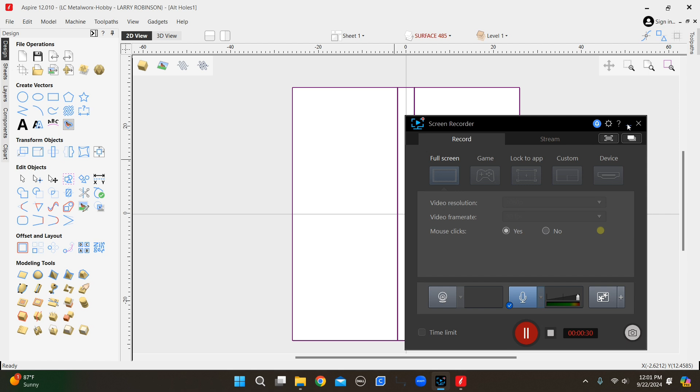So I may just show you my drawings, and I'm not that creative, so the things I'm doing are more or less from this video. Let me just bring it up real fast. I think there's a guy named Bob Cole that has asked me to put that link up of that video. I never knew much about him, and I still don't. I just ran across that video, and he has his drawing for sale, and I bought it for like 15 bucks.

Forgot where that was for sale, probably on Etsy. Eigen is his name. I'm looking for him right here. This is him. I'll give him full credit for anything I'm doing because he gave me the inspiration of what I'm trying to do. So the video that I'm talking about is this GOAT Spoilboard, greatest of all time Spoilboard. And so that is where I got my inspiration from.

I wasn't going to watch this right now. And of course the cat's grabbing one outside while I'm trying to video, so see how that works out.

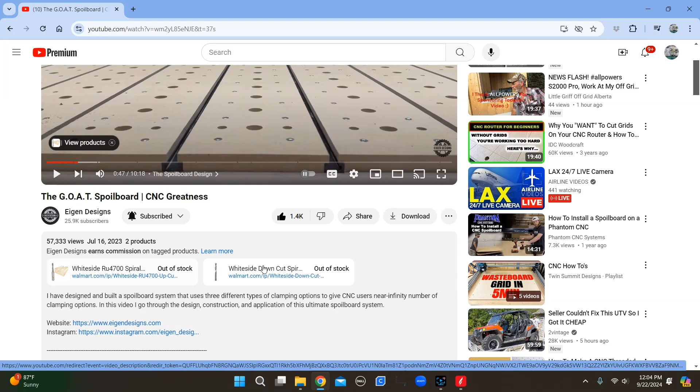I just wanted you to know that this is the design that I've bought and am using. I don't remember where he sold it, and the G-code that comes with it, he had it in a Onefinity, but he was using a large, like a 2 or 3 inch, see, there's 3-inch surfacing, 1/2 inch shank. We can't use 1/2 inch shank on things that we're doing, so I couldn't use any of that. I don't use other people's G-code normally anyway.

But anyway, this is kind of the T-tracks that I bought. Let's see if it's the same ones or not. Yeah, that's the same ones I bought. They're $43 for 4 pieces. I've actually bought 12 because I may put some on something else. At the time, I wasn't sure if I was going to use 8 or 9, so I think I bought 3 packages. So for 8 of them, like I'm using on the Altmill, it would be about 90 bucks.

And they give you the dimensions here, which has been useful for how I've been milling that out. And I'll show you that right quick. I'm hoping to get through this quick, I keep messing around. But anyway, get that over with.

I showed you this is the video, Eigen Designs, greatest of all time spoilboard. This video was made in July of '23. And somewhere in here, probably on his website, he does have a link to selling different files, and that right there is $15.99 for all of the files, which comes with a whole lot of other parts besides just that.

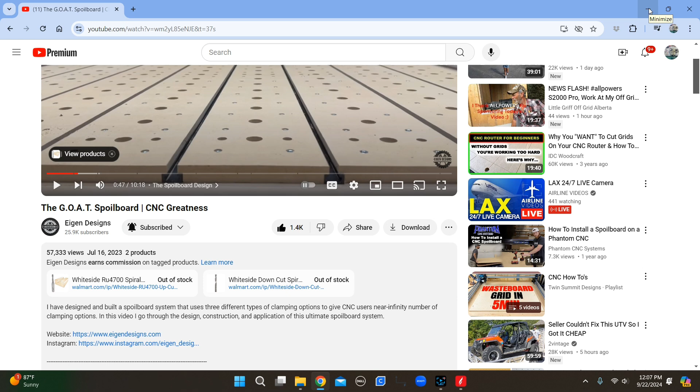It's also good to see how square your machine is. You need to get your machine really square and calibrated, and I went through all of that yesterday.

The easiest way to find how square your Altmill is as far as the cuts, there's a calibration tool in G-Sender, but honestly it was telling me to move it the wrong direction. So if you use that, think about what you're doing and the measurements you're getting, because it kind of dumbs down everything—it just says move the Y left this direction or that direction. Either I misunderstood what it meant, or it was just telling me the wrong direction.

So it took me a couple hours probably to do something I could have done in about 30 minutes. Let me show you a good way to do this though.

Let's just make this—that's another thing, the width is 51 and 7/8, which is the size of a piece of plywood or MDF that will fit down in that table. Those cross runners are about 14 inches apart, and the back two are about 11, I think, because it's turned different from the rest. I think the slot in the top of them is about where that measures.

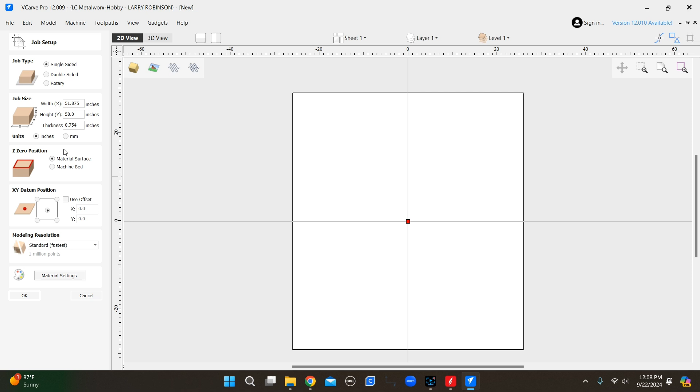So anyway, let's bring this up and I'll show you quickly—just draw something big that you can measure easily. I have some long steel machinist-type rulers that I like to read between a tenth of an inch, a hundred thousandths. I can see probably within 20 or 30 thousandths looking at that, so that's a little more accurate than using a measuring tape.

Some people like to drill holes and put pins in it, but you're going to do that a lot of times, so I wouldn't drill a lot of holes personally. I used a 60-degree V-carve bit and just drilled about 10 or 15 thousandths into it, then took a pencil and colored it in so I could see it clearly, and then measured that.

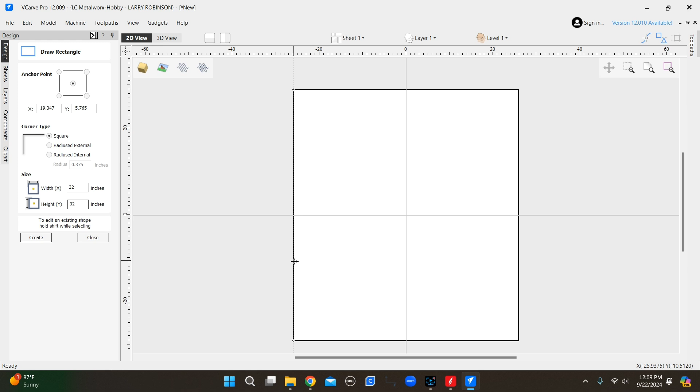So anyway, I think I was using, say, a 32-inch—I used the same in X and Y, 32-inch. So let's just draw a quick rectangle. I know there's plenty of ways to do this, but this is a quick and easy way to draw it.

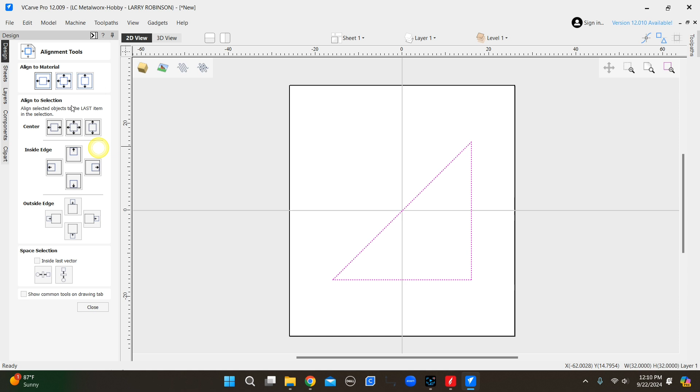Now all you need to do is, if you want to put this on center—I guess that is center, okay. I personally don't like it there. I know I'm wasting a lot of time, but anyway, let's not worry about that.

So you could actually pull your dimension tool up right here and just—oh, that's not the dimension tool, I grabbed the wrong one. Here we go, let's just dimension this out so we have it.

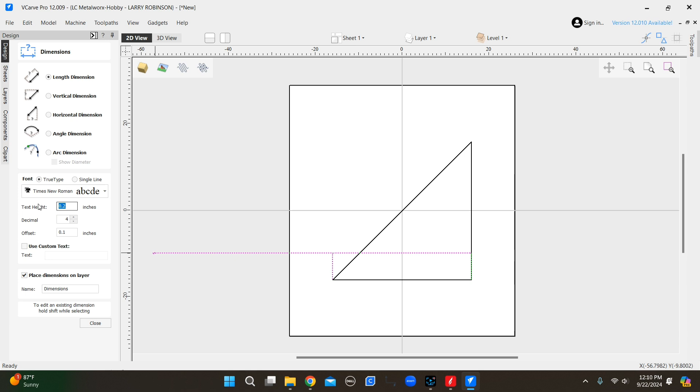Let's make this big enough to see—just put about 2-inch letters in here so we can see this. And there's that dimension, and the other one will be the same. Whoops, I'm not sure if I snapped to that just right—let's try that again.

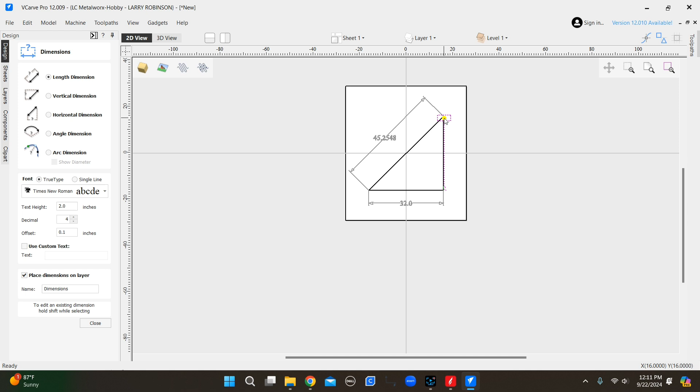Okay, and we know this is going to be 32 inches, that's what I drew it to be. So anyway, just for the fun of it, you can do things like that.

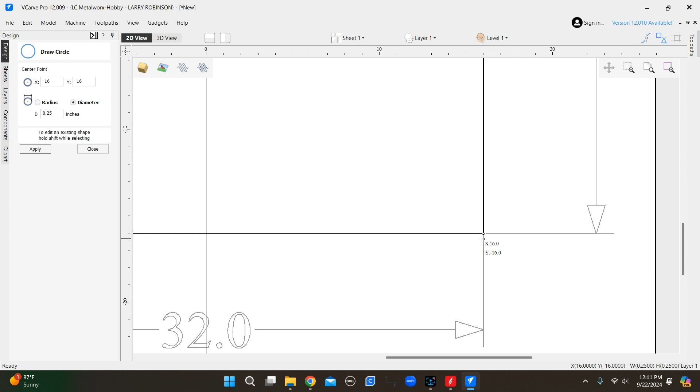Let me paint this so you can see this better. So when you just set your zero right there, let's just put a dot there for the fun of it. What you can do there is—it's just very easy to do your own method and stay out of the G-Sender tools if you can.

A lot of them are really dumbed down for people that just don't understand how to do things, and they need to learn how to do them, honestly. It's not helping you if you keep using really dumbed down tools, like surfacing for instance. The surfacing tool in there will work, but it doesn't work as well.

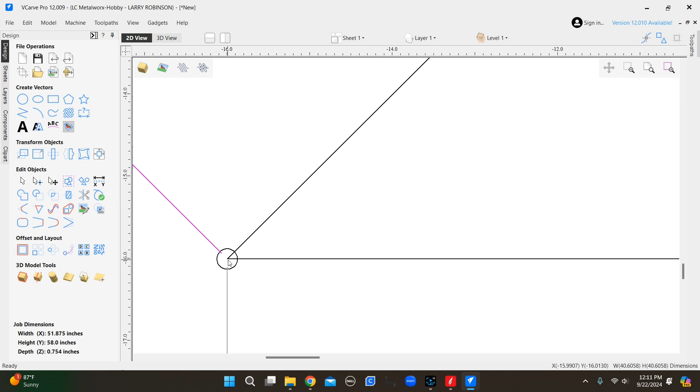There's something going on where I can't seem to select that. I don't care, I'm just showing you that you're going to have points that you drill right in those areas.

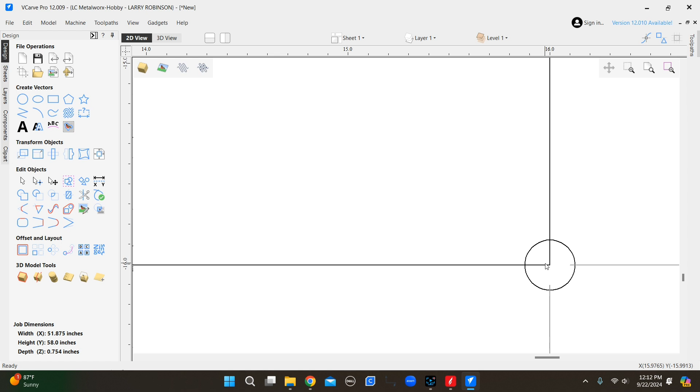So you're going to move the machine 32. You're going to come down and just drill a little small hole with the V-bit or whatever you want to do, to depth, just barely move it down, and you can run that machine around with the spindle on, and you don't have to mess around like you would if you didn't. If you use the G-Sender, you really can't run that machine because it takes you out of your main screen to do that.

So I just came around and I moved it 32 inches, drilled me a little tiny mark in the wood, and then I took my steel rule and measured these numbers. Honestly, the only number that really matters is as long as you measure this one and that one and you're getting really close to 32 inches - you may not get exactly, because you're eyeballing and measuring, you're not necessarily going to get exactly this.

But this cat's really driving me nuts. He never does this, but here I am on a video and he wants to whine all the time.

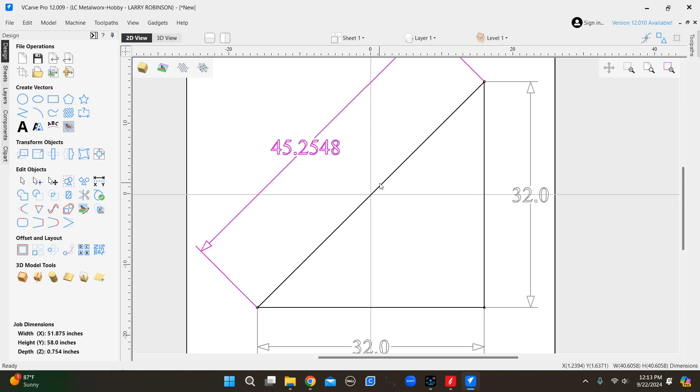Okay, this number is what's going to change on you. So that 45.255 number, so that's 45 and 1/4, really close to that. You're going to be putting millimeter numbers in the machine if you use that. Otherwise, you can use this method and see how accurate it is.

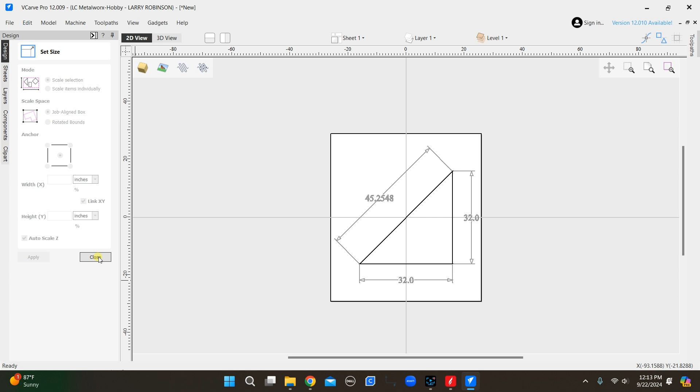And then all you're going to do is on the back of, on the Y gantry - just so I can quickly show you, hopefully you understand what I'm getting at - is just kind of roughly draw it out over here and stick it somewhere up here. What did I just draw? I did something - oh, I had that selected.

Okay, let's undo that for a minute. Let's go back up here. I'm just going to make it 48 inches by something like 3 inches. It doesn't matter, I'm just trying to show you an example.

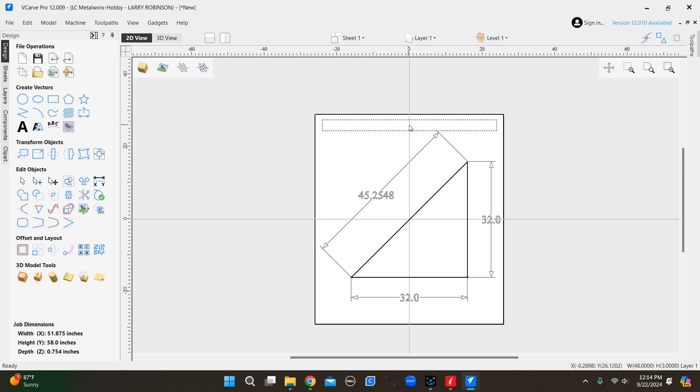So this display like this is your gantry, and you have your homing sensors back here that it homes to. So that's what corrects this, if you don't know this - if you happen to be a little bit crooked like this and you go and drill these, that's going to make this point and this point, and maybe even this point and this point, be leaning this way.

Now mainly it's going to be this line right here, because that's what you can adjust - the Y. You're not really ever adjusting X for anything. So if Y is square, then X is fine. So if you're crooked, this line down here at the bottom is going to be matching how crooked that is. That's all you need to know about on that.

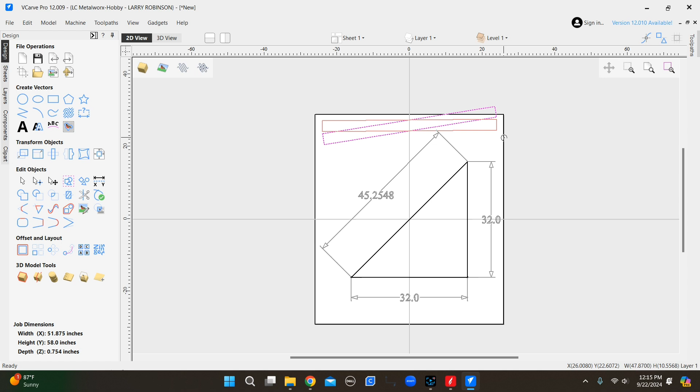I usually don't like moving these manually because you can get them crooked and it's kind of hard to get them back. I'm sure I'm just too dumb to do it, but I almost never move things manually like that. I should not have done that - I just thought it'd be quicker.

Anyway, that's just an example to show you how to calibrate your machine. Make sure this number is as close as you can get. And then if you want to go into that tool and calibrate with their tool and say, okay, what difference am I...

I think if it's going to say if you're within, say, 5 thousandths of an inch, this number is within that you measure - you are way within what they consider in tolerance. I don't know what numbers they use, but if this number is within, say, 5 thousandths, I think you are way within tolerance. And so you can keep adjusting.

So you're going to adjust your homing switch. And what I found mine was doing, just to give you a hint, is there's some stops back here - make sure that you're not hitting them stops when it's trying to home, because that is one thing that I was having trouble with, is I kept fighting it and it wasn't getting better.

And I finally got to looking, and when it homed, it literally was bumping that stop just a little bit. So I don't think it was really homing all the way - I think it was stopped and maybe even compressing a little bit on that stop. So once I moved both of them out another like a 16th of an inch or thereabouts, and then I started doing my measurements again, I came pretty quick and got it into where it should be.

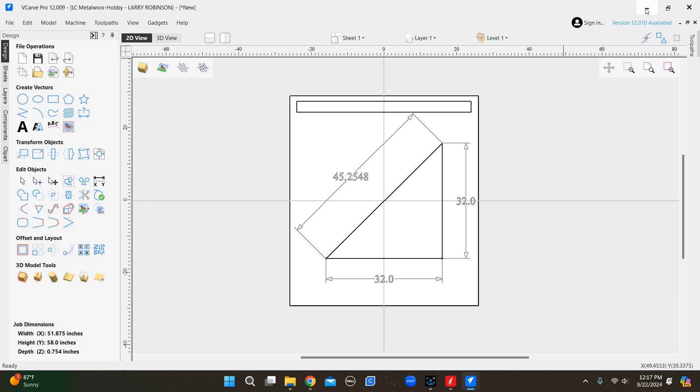I know I wasted a lot of time here on that, but it's important, and I wanted you to know if you didn't already. So I'm going to close this screen and get out of that, and let's go into this drawing. I know this video is probably way longer than it should be. I'm sorry, I cannot, this is why I don't make videos, I can't do it quickly. This is just my plywood.

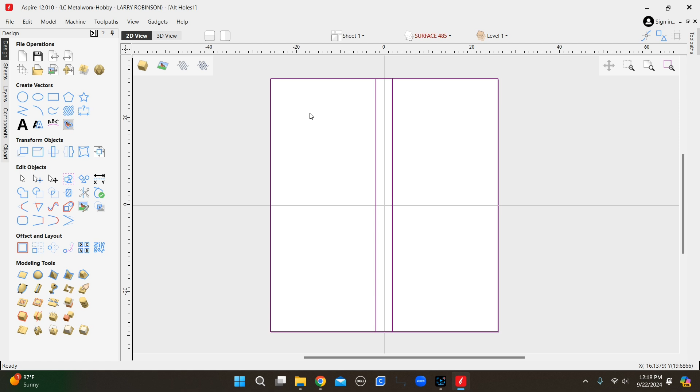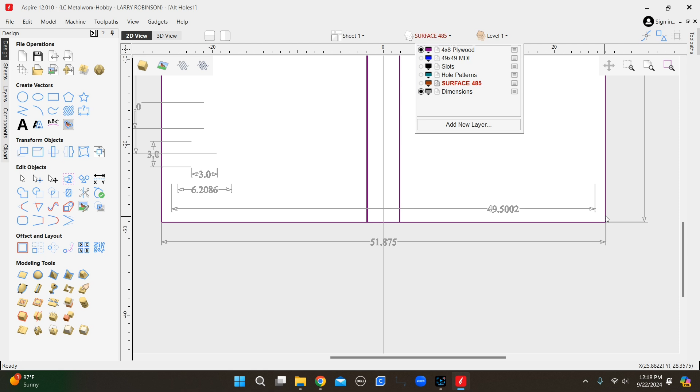The first thing I did is fit the plywood to the table. The table's 51 7/8 wide. Let me turn, I've already put the dimensions in here. I just want to show you. Here's the dimensions, I've got dimensions for other stuff in here. 51 7/8 is what will fit in that. I put some little shims, like strapping material saved from pallets, 4 shims so it wasn't tight in there in case of any expansion. I ripped a piece of plywood right down the center, and the gap it left was about 3 3/8 wide, right in here you can see, and I made sure it wasn't tight in there and touching.

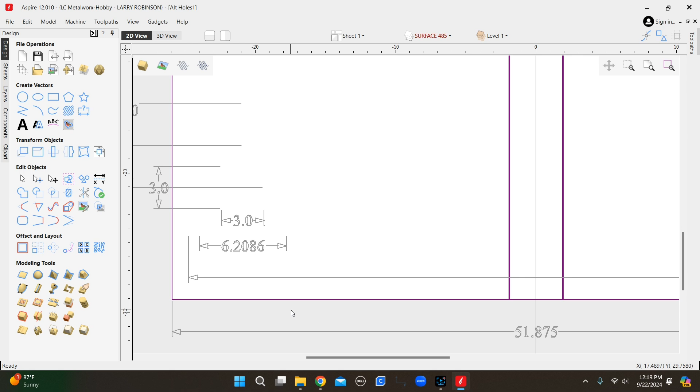And then I just screwed all the plywood down. That's pretty time consuming, I'm not going to go over it, you know how to cut plywood and put that on your table. So I left it at the front edge, back to where that slot on your front is showing, in case I want to use that to screw something down to.

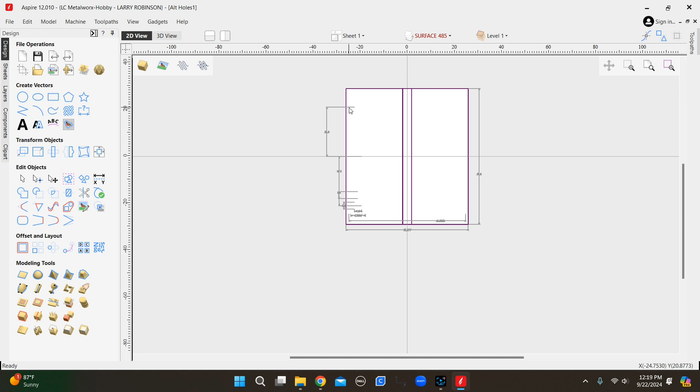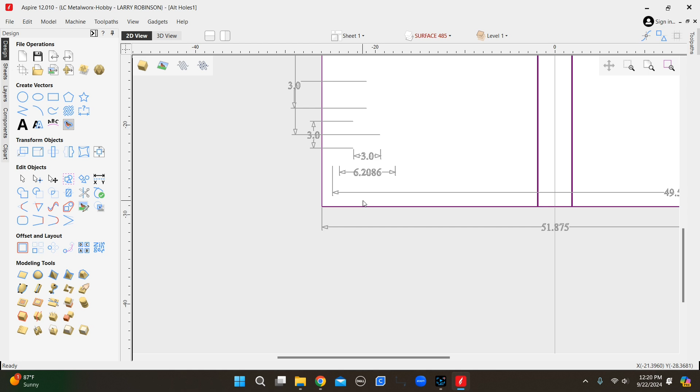The center of your axis on the Altmill, at least on mine, actually ends about the very front edge of that aluminum on the Y, and won't go back very far. From your home position to there is about 49 inches, just about to the front edge of that aluminum. So you'll have to hang your MDF really close to that front edge. I figure I'll leave it about 1/8 of an inch back from that edge when I'm done, but I didn't do that with the plywood, I left it maybe an inch behind that. I just want to be sure when I'm done with the MDF spoilboard, I can go all the way around with an end mill and not hit any of my limits.

So you want to be centered in your travel area. Find the center of your travel from home position right here. It's going to be about 24 1/2, because I was getting travel of about 49 in the X. I said that wrong, 49 1/2 that direction, so the center would be 24 1/2 inches. I would zero your G54 when it homes back here. Go ahead and zero your X and Y, then click it over here to X 24.5, at least that's what mine is, and then minus 24.5 this way. I think I told you wrong because you got 49.5 this way, so it's X 24 3/4 to that center point, and Y minus 24.5. That gives you the center.

That way when you go to mill these slots that I'll show you right quick here, that is the next step, I surfaced the plywood because I needed to put these slots down in here. Okay, now I'll show you if we have time. I'll try to quickly get through this.

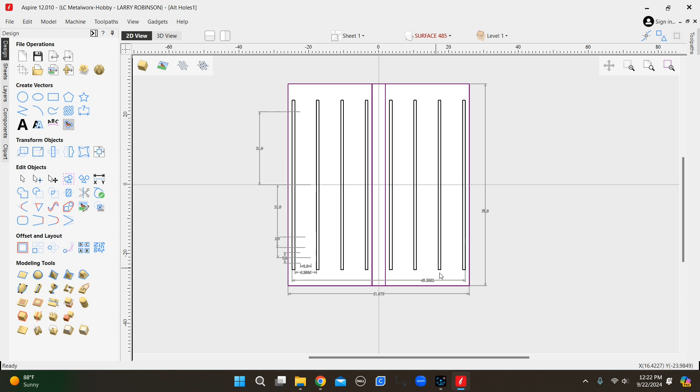I wanted to mill these slots in the table just a little bit, maybe about 0.09, 90 thousandths deep. I hate to go any deeper than I have to because I don't want to eat up the strength in this board, though maybe it doesn't hurt it. I just want it to locate into those and be cut in. Because the plywood wasn't very flat, even though I screwed it down as flat as I could and had the table level, I was about 25 high here, 25 low here, with about 50 thousandths difference from the lowest point to the highest point. So I surfaced all that, but I only took about 50 thousandths off, I believe.

And then I milled these slots 90 thousandths deep. Now you need to be sure you're in the center of your travel when you do that, because you've got to get your end mill to clear each end of these slots. And I wanted the slots as long as I could get them, because it's coming out here over dead space, because remember my plywood wasn't all the way at the end of the travel.

So I had to be sure that I set my X, Y, whatever, so that I didn't hit the end of my travel. But when I'm all done, I'm going to be hanging those out a little bit. And let me show you some pictures right quick of how I've got this. Let me open this so you can see these. That's just kind of a general picture I showed the other day of what I'm doing.

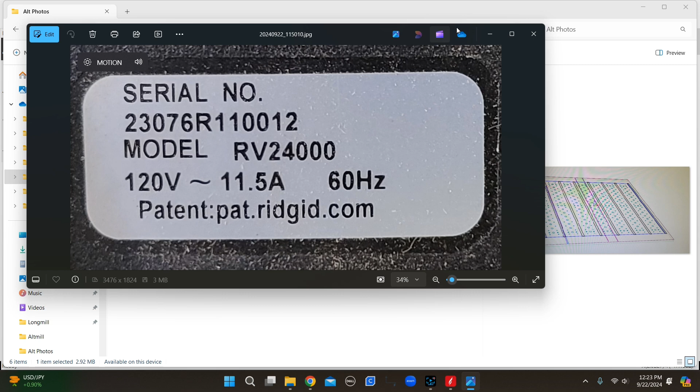This is the model number of that dust collection vacuum that I use out there. I got it from Home Depot. It's more of a commercial type. It's not a cheap one, but I think it's called the RV24000. You can look them up on Home Depot. I just wanted to show it in case someone asked that question. Well, where's the rest of my pictures?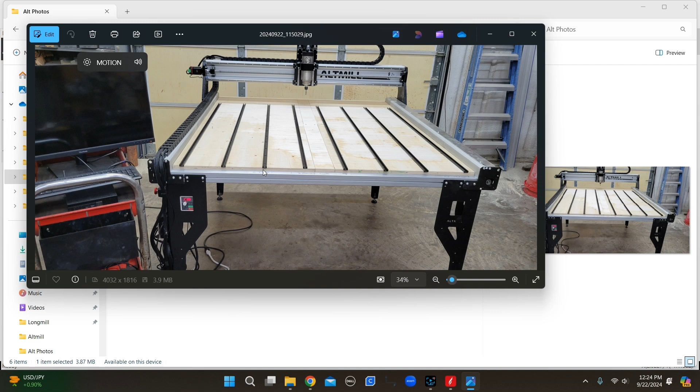And this is kind of where I'm at here. These are hanging out. I don't know if you can see, but these are down in the wood. So I cut 3/4 slots in that wood, 90 thousandths deep, just so they sit in. And I haven't yet drilled these. I was going to just kind of spot drill these spots where the screws go, so I make sure I'm in the center of those

countersinks. Those are weird. On Amazon I think it says those are like 4-inch and 2-inch spacing, but it's not. It says it's 2 inches from this end. I measured them roughly with calipers to be about 3.985, and so it's possible they really didn't come out to be 100 millimeters either. So I don't know.

I'm going to have to go out there and probably take a pencil and mark these and set a little spot drill or a 1/8 drill or something, and see if I end up right on top of the center of all of the spots that I mark. And if I am, I'll go ahead and run the program and of course get these out of the way and just spot drill these where the screws are going to go. So anyway, that's kind of where I'm at.

I wanted you to see this computer too. People talk about using laptops. I do not believe you'll ever have good success using laptops. All I see is people complaining they lose connection and everything. I never lose any connection on either one of my machines, and I use these little Dell Optiplex computers. You buy them on Amazon. They're refurbished, but they look brand new.

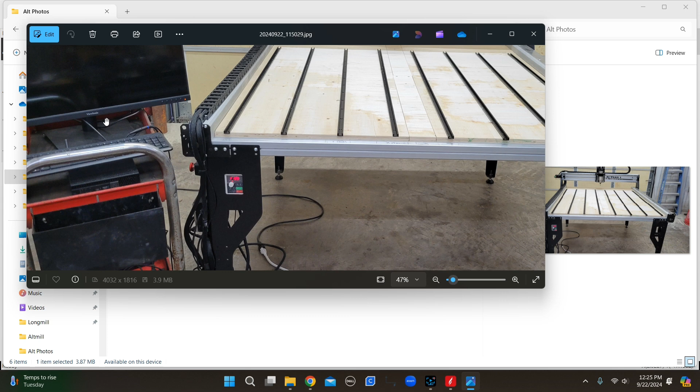I think it's $165 for the computer, and then I use these 32-inch monitors that are something like $150. So that's what I like to use, and I use a wireless keyboard and mouse, and I move these around. Now when I get my shelves built under here, this stuff will live somewhere under the table in more of a cabinet style situation, but for now we're still building the Altmill, and that's just how it is. So just wanted to show you that.

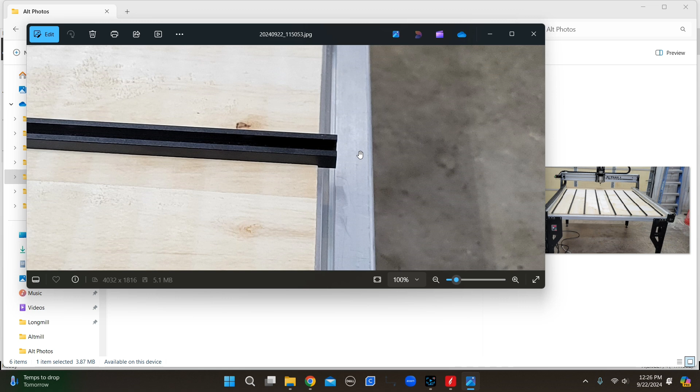And so now at the end, I was telling you, I'll end up having to hang these out because my travel is going to be out here, but I don't have to be all the way to the end of the travel, but I want to be hanging out a little because I'm going to bring that MDF out. Like I said, so that I still have room for, say, a 3/8 end mill to pass here and be in my travel. And so I'm going to make the board 49 inches, and that gives me a little room on both ends here to be able to do that.

So I'll just have to take an end mill out here and line these up, just bump against it or something, and then mark the holes or whatever, and I'll know that I'm lined up perfectly in line. Not that it probably matters that much, but I'm very much an OCD type person.

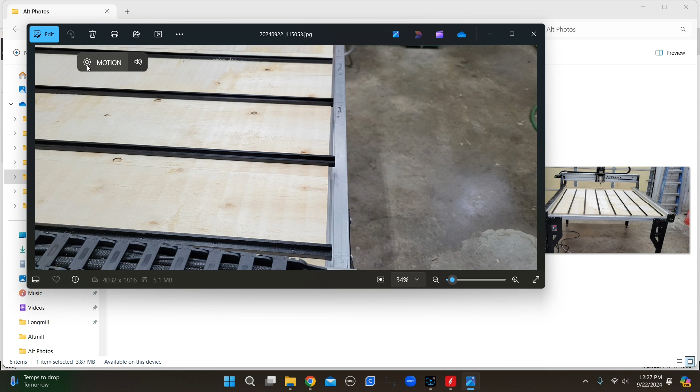I want them to be perfectly aligned. And let's see if there's any more pictures I wanted to show you. Don't think so. This is just what it looks like at the very back. You're just going to pocket out, and you're going to have a good amount of plywood here at the back that you can't surface.

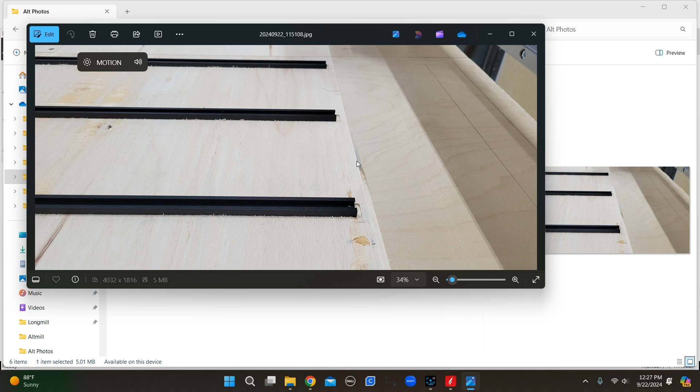And it took me a while to decide to do that because I didn't want this to not be flat, but honestly I finally realized it really doesn't matter because MDF is going to be laying in this area, not out here. So I surfaced this as far as I could possibly reach in the travel that I had, and that is right at the home position. And that's just how that turned out.

Okay, so I don't want to bother you with a bunch of junk, but anyway, that's where I am with this. I know this is probably a long video, so I'll show you through the rest of this. So the first step was we got the plywood on there. That's the plywood. Remember, three pieces of plywood. Actually, I messed up and cut it wrong, and I have 2 strips in here, but if you do it right, you'll end up with 1 strip that's 58.

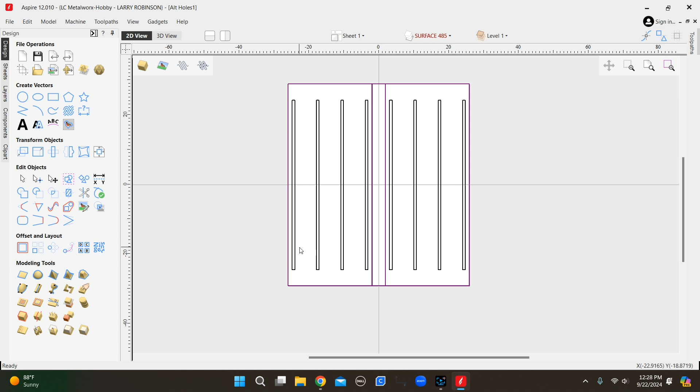Now these are not centered in here like this. When I set my 0, I'm not doing any CNC work for the plywood, and it's just easier to draw everything in the center. So yes, I know these slots are actually sitting beyond this down here, but the plywood is not part of a CNC operation, at least not right now. When I drill some holes later it may be, but not to this point. And if you'd like these files that I've drawn here, I can certainly share them with you.

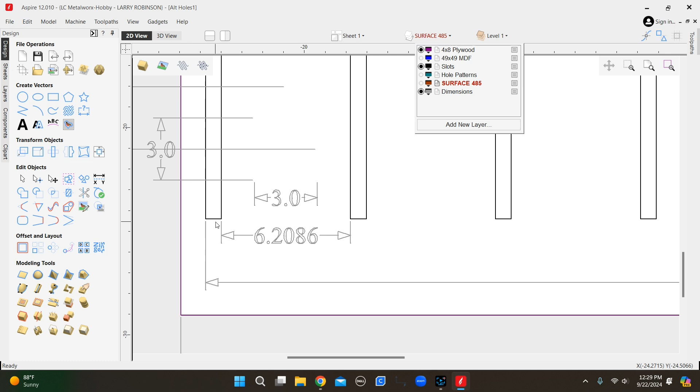That's why these dimensions are drawn here, because I wanted you to know the spacings. This is just the way this worked out to put 8 of them, and this is at 49.5 inches, which is just about at your travel extreme right there. Now it's pretty close to the left limit because that's where your home is. I would probably recommend bumping this line maybe 30 thousandths to the right, because you have a little more travel over here.

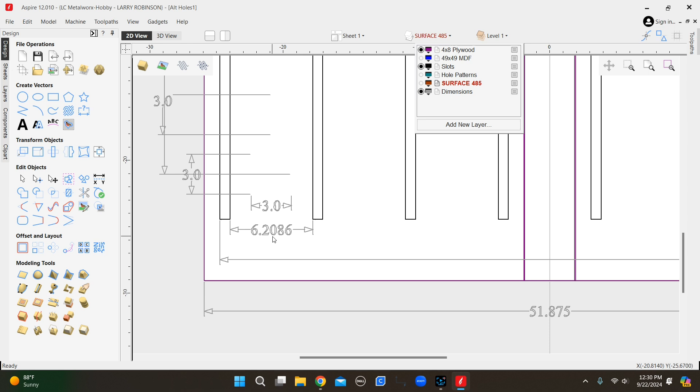At the same time, I wanted it to be centered in this area, and I ended up with about 1.1 inches on each side between the machine, just a shade over an inch on each side. But here's your dimensions, Bob, if you're watching. The distance between these ended up to be 6.209, you might say. You need to use these 4 digits for accuracy when you're doing a bunch of spacings, but 6.208, with a 6 inches, assuming you're using inches.

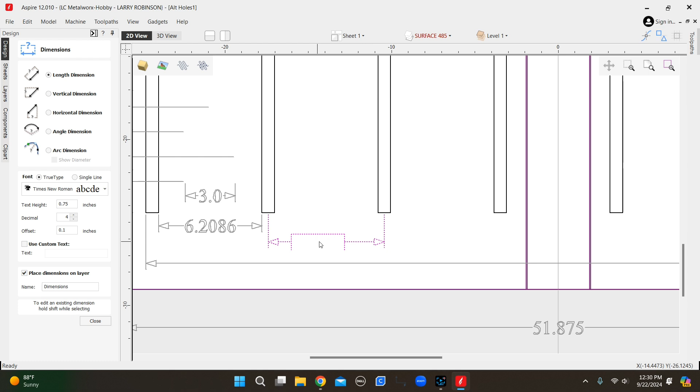The number from center to center, I thought I had it on here, but I guess I didn't. Actually I have it written down over here. 6.963, with a 6, is center to center on all 8 spacings. Now your spoil board's not going to be out, it actually is going to end right inside that. I probably didn't put that dimension. I have too many dimensions here and it looks pretty crappy already, but just for the heck of it,

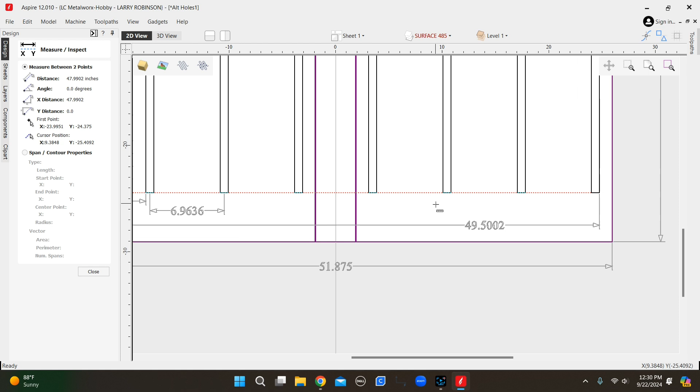well, golly, I had the wrong one. This video is too long. I'm sorry about that. I know you're not going to watch all this.

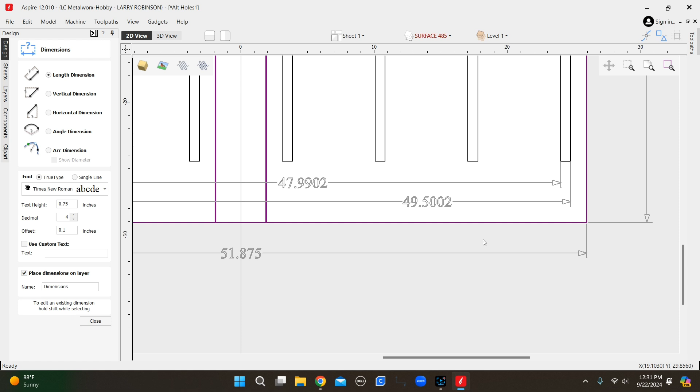Let's put this somewhere where we can see it. This is not very professional looking. I'm just showing you that's 48 inches between them. I probably didn't measure it perfect, but it should be exactly 48 inches between these. So I'm going to hang my spoilboard out to where it covers, and I'll show you this in a minute. It's going to cover just like these hooked over the ends in that picture that I showed you of the fella that made the video.

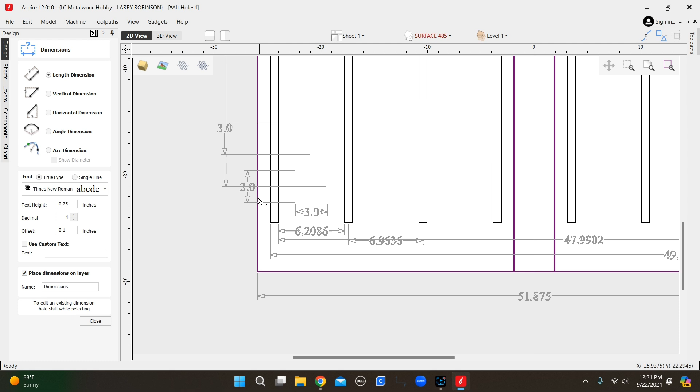I wanted these outside ones to hang over, not into the slot, but just over that part a little bit, so it's holding it down a little. So when you've got something clamped down to the top, it's helping if you tighten against those. Everything's sandwiching together and not trying to rip stuff out of the wood, because I wouldn't be tightening very tight on clamps. I'm not a fan of clamping anyway. Taping something down or counterboring and putting bolts through these inserted holes is much better.

Clamping is usually, in my case, only used for drilling and getting your holes in it or whatever you got to do like that, and not machining. You normally will scoot it around if you're only clamped down.

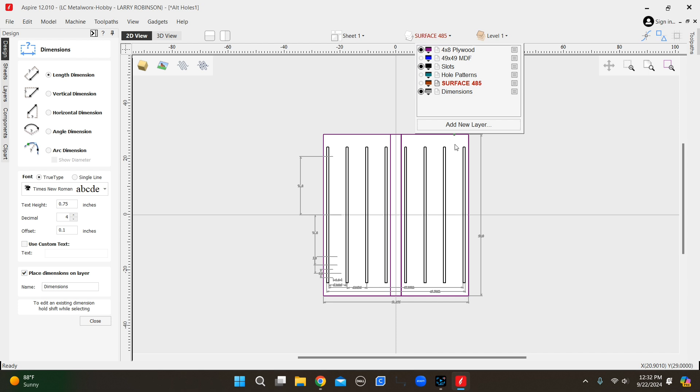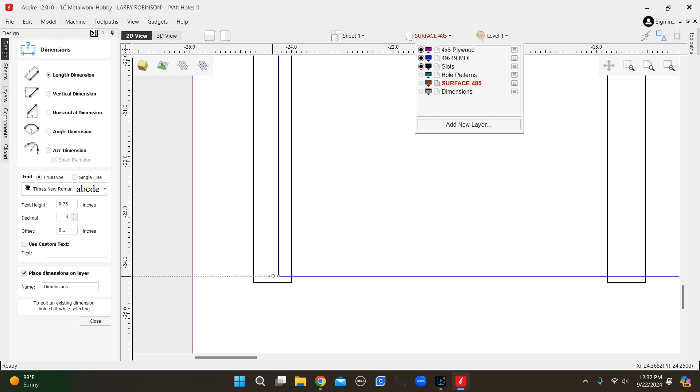All right, let's turn the dimensions off. They're messing me up. So we got the plywood down. We've slotted that about 90 thousandths deep. And then we're going to show where this MDF is going to end up laying in here. So like I was just telling you, it's just going to come over to the edge. That's going to be slotted through here when I'm done.

So this is a lot more complicated of a way than what you would want to do yours, I'm sure. I want to show you how I'm fitting this. So I drew two examples here of how this is going to work. This represents your T-track, and this is that 90 thousandths that I put into the plywood that they're just going to locate down into here, right? So you're going to just bring them up and set them down in there, and screw them down, and all that complicated stuff.

After that, we're going to start working on the MDF, and this will be the final project. I want to back this away from here so it's just easier to see. This part is how the MDF will eventually look, but because I don't have a good setup with my table saw that I trust, that I can accurately 100% guarantee not to scrap one, normally you would just cut these in strips and lay them in there and then cut out that part so that they clear around here by just a little bit.

Not much, just a little breathing room there. So you're not binding up and shoving up against this and all that. You want it to just have a little breathing room, maybe 10 thousandths of room under there or so. So that's why the plywood needs to be really flat when you go to mill out these depths and all of that kind of stuff. So I'm not doing it that way.

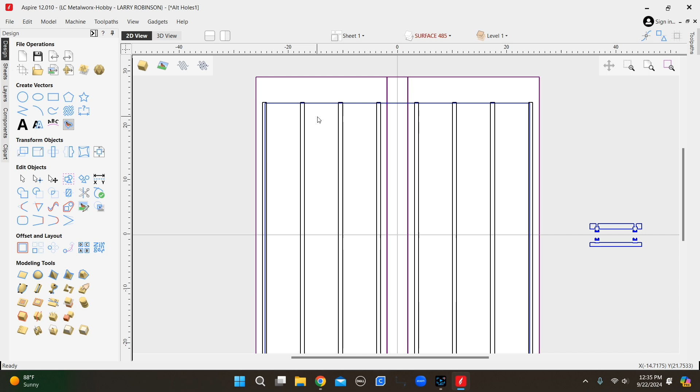Okay, so that's how the MDF lines up. Now what I'm going to do here is, see, this is on 0, still using that 0 of my travel, and I realize that this is not showing right because the plywood is sitting up high, that's the difference here. If we wanted to make this look right, and I hate to mess with stuff here, but honestly, the plywood is sitting more like that. Just for an example, I'm not going to save this.

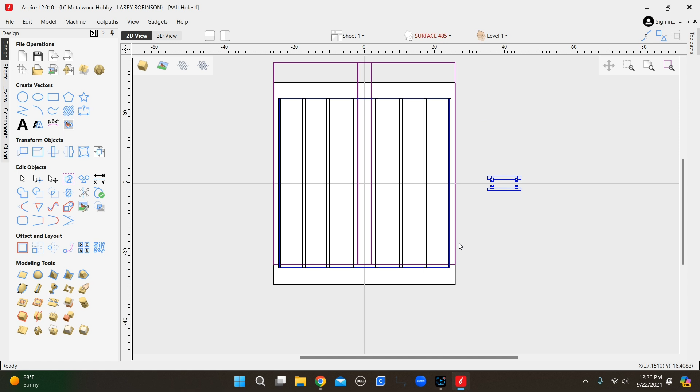So I'm going to turn off the plywood anyway for right now so we can think about what we're doing, because it doesn't really apply to this, and I don't want you thinking about that right now. All right. So that's how your slots are already in the table. And that's how the MDF lines up. And this is 0 right here. Okay.

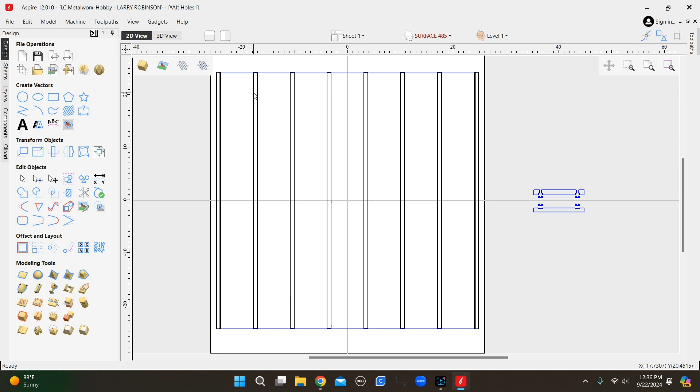That doesn't matter that much. What matters is now we're going to slot out that MDF to the depth that's left over. So we took away 90 thousandths here and set those in there. I've already went around and measured how much they stick up all over the plywood, and they're roughly 300 thousandths sticking up. Okay, they're 370 thousandths thick. I measured them from the factory. That's just a little clearance for 3/8 is what it is.

So we got 0.37, and now we've roughly milled 90 thousandths deep. So we're going to have 300 thousandths. I'm just telling you what I measured. So I want to leave about 15 or 20 thousandths clearance just to make sure that this operation I do when I flip it over is not going to give me trouble. And it may. You're going to have to have a perfectly square machine for that to work out.

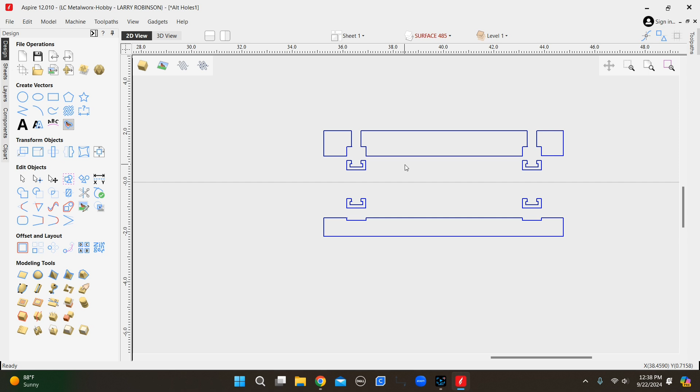But so that's what that amount's going to be, that we're now going to mill this, let's just say 320 thousandths deep. I think I'm going to do something like that because I don't trust that everything is perfectly flat, level. The wood's maybe going to swell a little or something like that. I'd rather have, say, 10 thousandths or 15 thousandths clearance around that than to ever be tight. We'll have a better chance of that working out, I think.

So now we're going to have this thing here. Where did we leave off with this? Everybody's walking in here and really getting me confused.

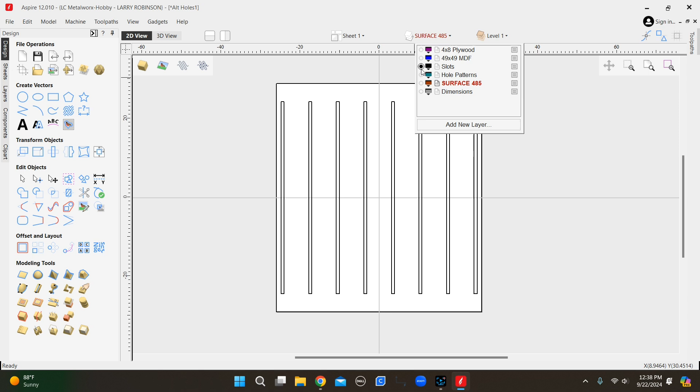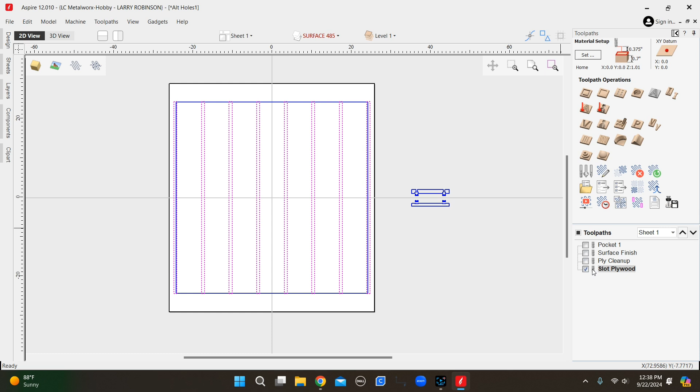We've got MDF. Okay, that's what I was telling you. So we're going to mill the slots in the MDF, what did I say, 320 deep. So that same program that I had in here is basically the same thing. I'll have to use the same one. That way they're located exactly in the same place. Same zero, same everything. So the way this one worked was just like I told you, it just milled them here.

And I know that's funny looking because the plywood is like this, but it really did come out the front end of the plywood. So if you want to hang your plywood out and do it like that, that's still fine, because the slot is going to be sticking up to where you can get in the ends of it anyway, as long as you don't go too deep with these.

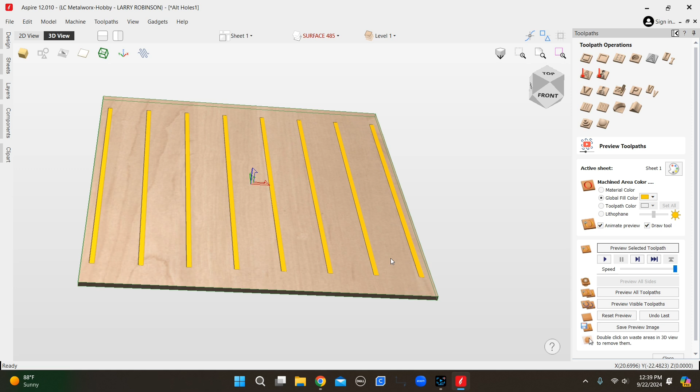You'd have to go over 1/8 of an inch deep before that would be a problem. And even then, those little bolts and studs that come with them, they're very thin, and you're not going to have an issue. So it'd probably be best, honestly, if you put a bigger piece of plywood and just flush it up to the front of your machine if that's what you want, and you'll have plenty of travel.

Just make sure your MDF is sitting in there to where you have room to profile all the way around that one. I like to have good square corners and true edges on my MDF spoilboard that I can get all the way around. That way I can always measure up to it. I can get my tool setter on here, and I can find my zeros.

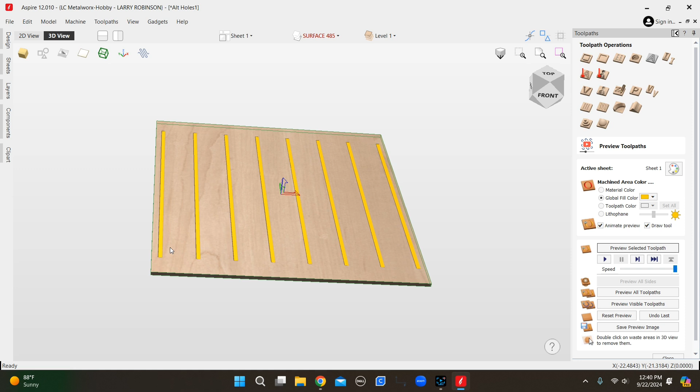I can do all of that stuff as long as I can get, now I have to be careful about that. I have to think about that, but you don't want that tool setter out here so far that it can't work. So we'll see if that's a problem. If it is, we may have to have a different workaround, but we've got so many holes on this table, we can do something about that. But I do like to have a good square corner to work off of. So that's just kind of how that part worked.

So now let's go back and try to get through what we were talking about here. Now we've got the slots cut in the plywood, and I need to mill those in the MDF next. But that's all it amounts to, we're going to just mill these down in the MDF 320 thousandths deep roughly. And then here's the scary part, this is why everything has to be perfect.

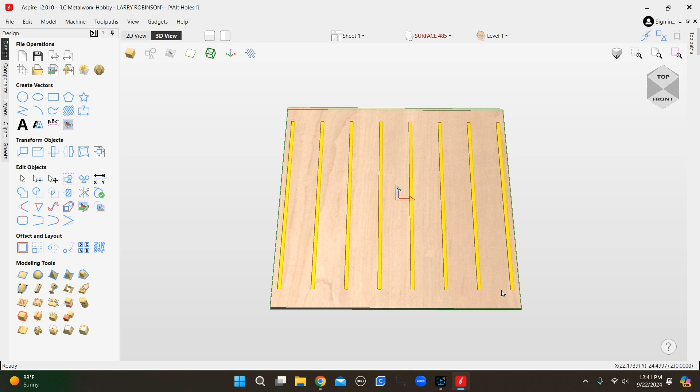Now at this point you should have had, I haven't done this yet, I have to figure it out. I've got to have some holes, and let's get to where the holes go. And here's the hole patterns that probably will eventually be here. So this, see where he's got the, I'm just using his hole pattern for now, and I don't know if I'm going to use them. I just got it in here.

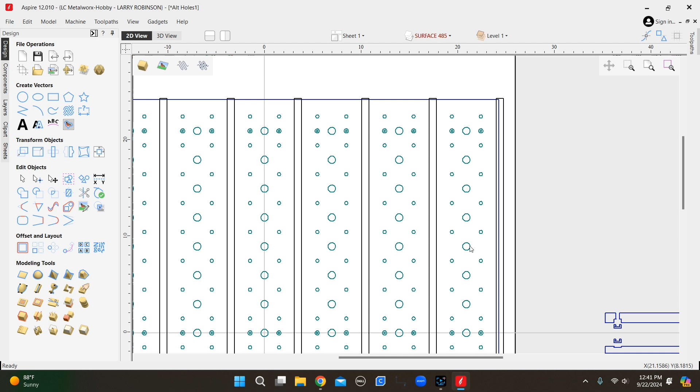And I took out the boxes. He had the square around it where he cut them out. I took all that off, and all I did was center these hole patterns into this distance I have in here. So he's got these bolted down in 3 places, so I think I can do that. If I ever think it needs more screws, I can come back and add 2 more, the same type of location, halfway between here, everywhere I think it needs it. I don't think it really needs it. I just worry a little bit about that.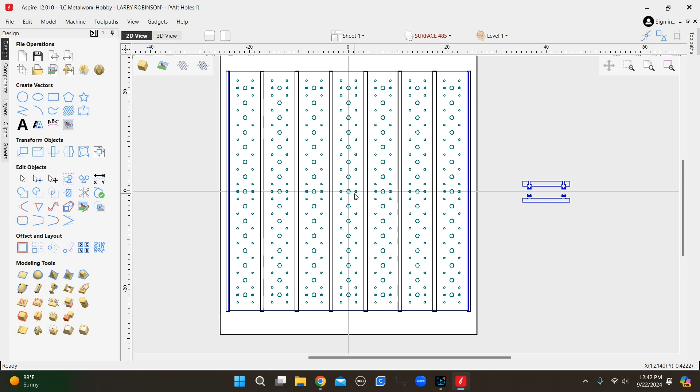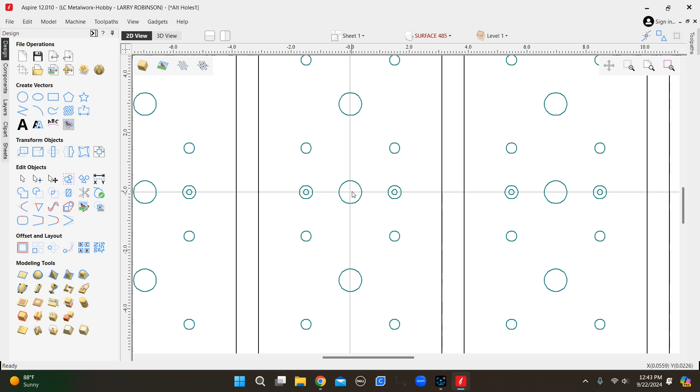But anyway, before we mill these slots, I do need to have some of these holes milled into both the plywood. Probably some inserts in the plywood I can screw that into. And so that when I flip this, now remember we're centered right here in the very zero, and that's going to end up a 3/4 hole, which I may leave out. I don't know that I want a 3/4 hole in the center of this. I don't think I do, because I like to use my center hole for locating something like a 1/4 inch end mill or something. I can find my center of travel anytime I want to. So something you can fit in your spindle needs to be that hole size.

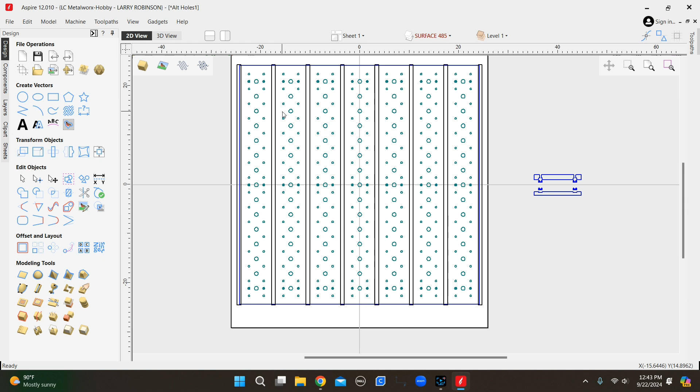Probably would just, now I've got these grouped, I'd have to ungroup that to do that. But anyway, that's what I would do, is probably not do that. But I'll go ahead and probably put screws in the center of this, and then probably 1 screw in all 4 corners at the very minimum for milling this out. And you're going to have them all eventually, so you probably ought to just go ahead, there's 2, 4, 6, 8, 10, 12, 14 times 3 is what, 42 screws it's going to take.

I even thought about, if this doesn't interfere with where the table is built, the cross members of the table, I might even go through, and I have a bunch of lock nuts and screws, 1/4 inch screw, that would take about a 2 inch screw or something like that, to counterbore this eventually and put them down with nuts on the back side so that you're really secure. But really, I don't think it's necessary. It's probably easier to go in and counterbore all this in your plywood just to make sure it's below depth, and go ahead and just get all of those in that plywood.

And see, I'm learning this as I go. I haven't done that yet. So just talking about this kind of lets me know what the next step really is of my progress, because all I've got at this point is slots in the plywood. And like I said, I haven't drilled them yet, which maybe ain't that important right now anyway. But I think I will go ahead and, that's probably the next step, get all of these holes, not all the rest necessarily, just what's holding that MDF down.

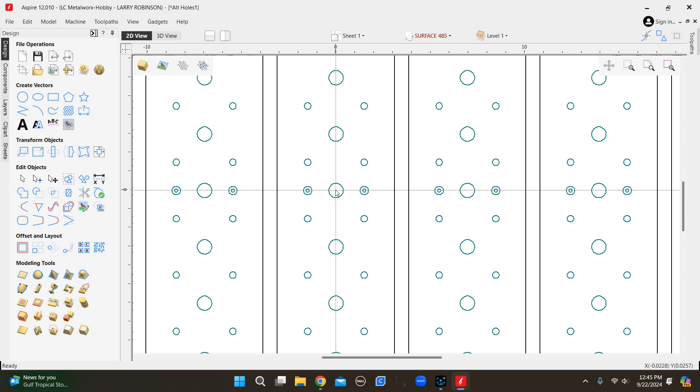And then probably have you a hole in the center. I've kind of messed up my center hole when I was still calibrating the table. I've got a 1/4 inch hole that's not center, so I'm probably going to have to go with some bigger size hole in the plywood here. I don't know what size, but I'll look into that. So I'm probably not going to put, these 2 are what's going to hold me, so I probably better go ahead and get all of those in the plywood first.

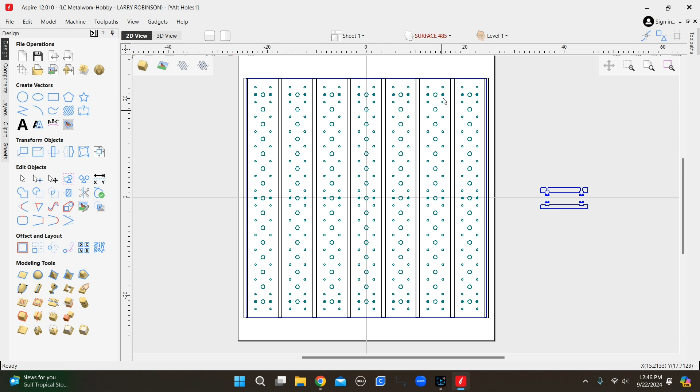Anyway, I'm really going on and on with this video. I'm so sorry. I cannot make short videos. I can't do it. I've tried. So if you don't want to watch all this, just scan through this quickly, and if there's anything useful, I'm hoping to show things up here close so you can always go to it and zoom in, pause the video, and look at some of this that I've rambled on about.

So let's look at some more layers here that I've put in here. After that, like I said, we're going to mill that out, and if your hole pattern's in the plywood and this, you should literally be able to flip that upside down and it should fit. Should. Okay, should fit. Now remember, we didn't counterbore this side. We don't need to yet, but you could put a bolt and a washer, make sure it don't line up with one of these slots, and it shouldn't, because remember, they're over in these areas. So just so that you drill your 1/4 inch holes, mill them out with an end mill, whatever you do, should be a close enough fit.

If you're worried about it, undersize them with an end mill, and say instead of 250, make them 248 or 245. And if you need to open them up with a drill, go get you a drill that's a little bit undersized until you get that. It's just pretty critical when you flip that thing over, and I don't know if you're going to flip it in the Y direction or the X direction. I guess whichever way it fits the best is what I would say. And I don't know how you're going to know that. It should fit.

If I don't have any real high spots, and I really don't, I've already checked, I'm pretty close. But I think you'd have better luck flipping this in the Y direction than trying to change sides with these, because if something's square this way it should be square, but you could have more issues. This is to be determined, I don't know. It may be a complete failure when I get to that point.

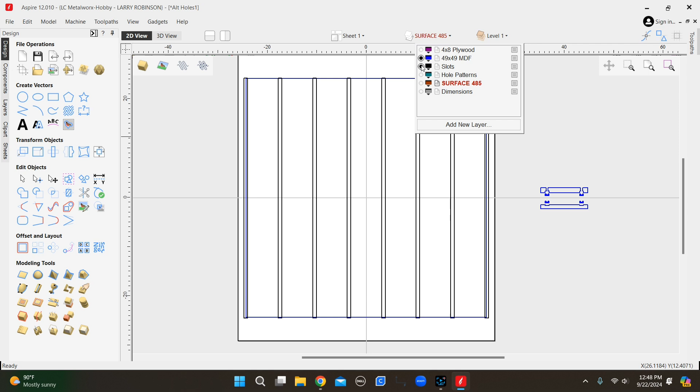This is time consuming, so you're not going to get this done in one weekend. This will go on for a few weekends, maybe a month, and then start building the cabinet around it. So anyway, that's where we're at. I think you understand now where we're going with all this.

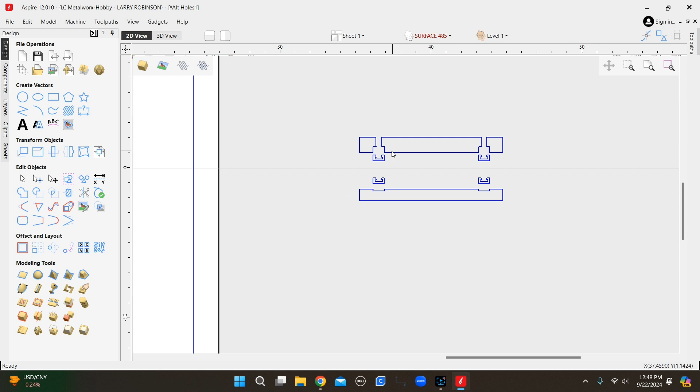Let me turn that back on so you can look at this. If you want to zoom in and think about this, these are going in the plywood. This is the MDF that will be flipped to look like this. It will look more like this with deeper slots on the first operation, and then when you flip it over is when you'll do that and get all your hole patterns, counterbores, what have you, done just right. But you can go ahead and have your through holes in it, and theoretically they will line up if your table is perfectly square, if you've done everything right. This is a good time to know for sure that it is.

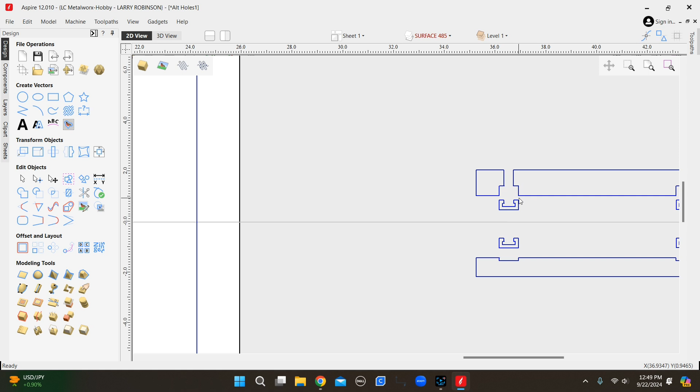In fact, before you even run any hole flipping patterns, you really should mill, and I think I've done this. My numbers are perfectly, I've got the same width front and back, just using the measuring tape, stuff like that. I believe I'm well within square enough, and you should allow a little bit of clearance around any of this anyway, because this is just not a perfect world. Everything doesn't fit when you make it as well as it does in a drawing, we know that. So leave 10, 15, 20, 30 thousandths clearance around any of this stuff, both the height and the sides, because it's just not that important for it to be that tight in here.

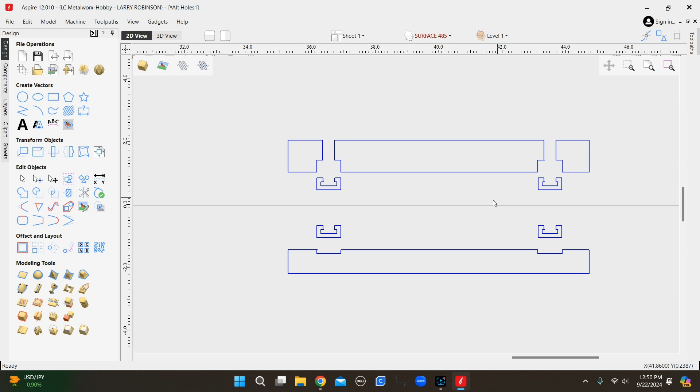You just don't want it to move around that much. 20 thousandths would be a perfect amount of clearance. If you flex something 20 thousandths, it's going to stop at that point, and you're not going to break something or anything, so I think that's fine. And if it ever was a problem, you could always pull these out and put a little shim under this if it was too loose. But we don't want to have to do that, it's a lot of work and everything.

So anyway, that's where we're at with this.

If there's anything I can help with, I'm not here during the week. I'm a machinist - if any of you don't follow me, I'm a CNC machinist at an airplane manufacturer about 35 miles away from here. I'm gone 60 hours a week, and Saturdays and Sundays is the only time you'll catch me here. I don't have access to my phone or anything else usually during the day at work. It's a pretty tight deal. We're kind of under government rules and regulations a lot of times because of the aircraft type situations, so we're not at any liberty to just do much of anything, you know. We feel like we're in kindergarten class. But I work hard all week over there, so I can't be available, I'm tired when I get home. I don't do this stuff during the week.

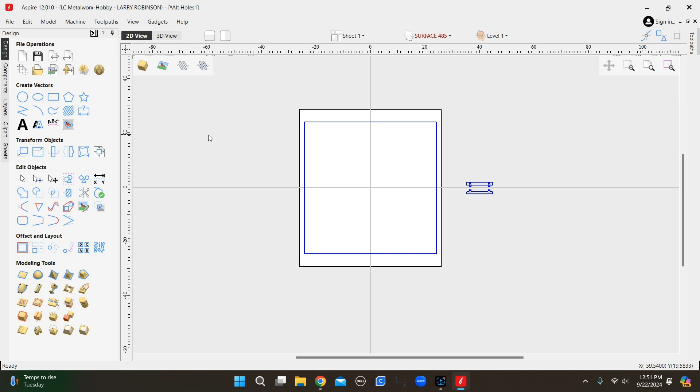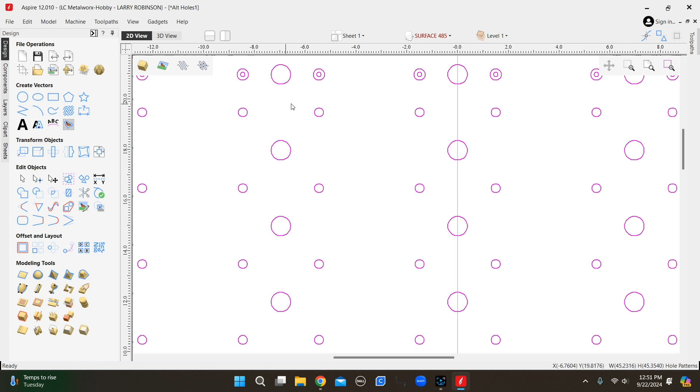And if you don't like any of this, don't do any of this. But I can share some of - I can't really share you, I really don't think I can share that whole stuff with you, because that is his drawing. Other than that, none of this stuff that I have is his drawings. I didn't use any of his stuff except those hole patterns I actually got from him. I probably will go in and change sizes of some of it because I don't know that I like them, but I don't know that I'm supposed to be sharing any of that. So, if you could, don't ask me to share that, because I don't believe that's legal, or at least according to my agreement with buying from him. Just go buy it, help the guy out, it's $16 and you own it, so you don't have to worry about it. And it helps another guy, just like you, trying to make a few dollars paying for his hobby or whatever that is that he does. I don't know, but...